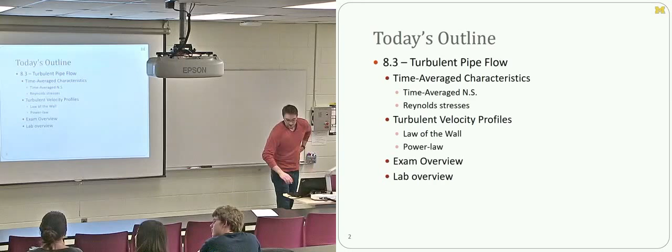All right, let's try to get through chapter 8.

So in the last lecture, as I said, we talked about laminar flow through pipes. In particular, we addressed turbulence, sort of talked about what turbulence is, but today we're going to get into the nitty-gritty a bit more.

Turbulent flow in general is a tough problem. There's no great way to describe turbulence exactly, and we don't really understand what makes it happen. All this random motion that happens with turbulent flow, we don't have the mathematical horsepower to track every single fluid particle and predict how it's going to move. We don't really have the refined theories, things like chaos theory and fractal geometry, that give us a cleaner way of talking about this sort of randomness. There are developing mathematical theories better suited to describing randomness, but we're still not quite there yet.

In general, remember that we judge the character of a flow through a pipe based on the Reynolds number, defined as the speed times the diameter of the pipe over the kinematic viscosity. Below Reynolds numbers of about 2,000, we call a flow laminar.

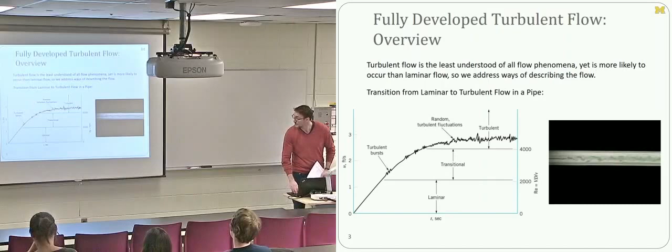We don't have a precise way of defining turbulent flows, but there are a number of characteristics which we see in almost all turbulent flows. It's one of those things where we can't really define it, so let's describe it. These characteristics are listed here. This guy from Texas A&M put together this list. I thought it was very eloquent.

First, we see that turbulent flows are almost always irregular. They're random, they're chaotic, they're fluctuating, and for that reason we have to use statistical methods to describe or characterize them. Turbulent flows are diffusive. That is, there's all this crazy motion of fluid packets, and it causes an enhanced mixing of fluid layers.

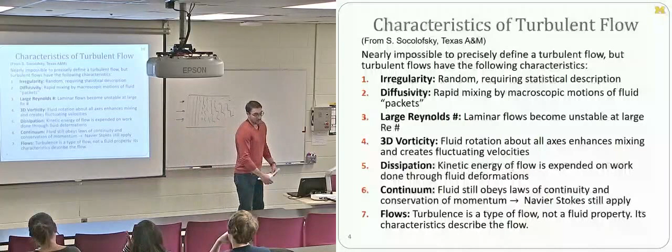These last two points are sort of sanity checks on us more than the flows themselves. We have to remember that turbulent flows are still a continuum, meaning nothing has changed about the physical system we're looking at. All of the conservation laws still apply, and the governing equations are still intact, meaning Navier-Stokes are still accurate. It's just a lot harder to apply Navier-Stokes because now all of our velocity components, we can't look at big chunks of fluid because there's so much small-scale random motion.

Finally, we have to remember that turbulence is a type of flow which remains distinct from the fluid that is flowing that way. In other words, we've got to keep clear in our head that nothing about the fluid properties changes when the flow becomes turbulent. There's different characteristics of laminar and turbulent flow, but in both cases, for our purposes, we have water as the underlying fluid. So keep the two separated as well as you can - the type of flow versus the fluid that's experiencing it.

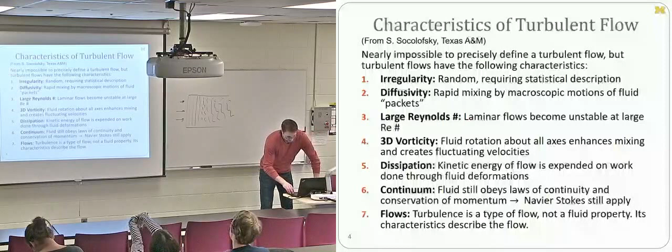So I found this video. It's actually from the conference I was at last week. There's this thing called the Gallery of Fluid Motion, which is sort of artistic presentations of fluid motions. This is a particularly nice video of turbulent boundary layers on the plate. I'm going to turn off the light so we can see it.

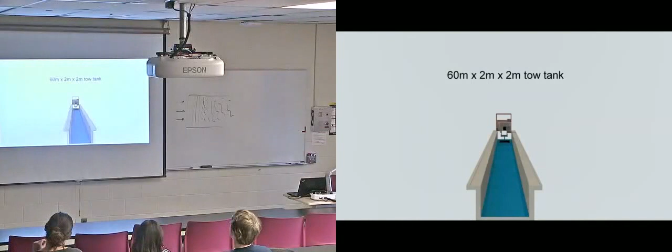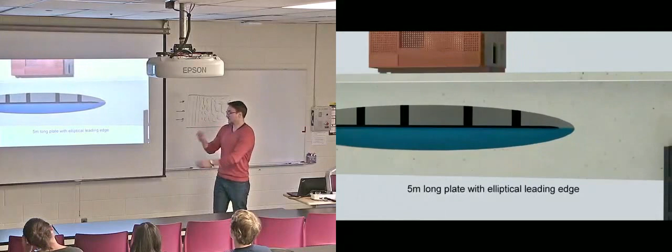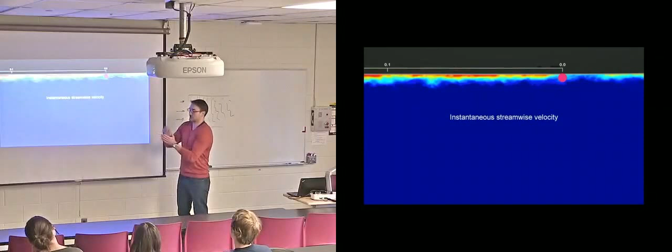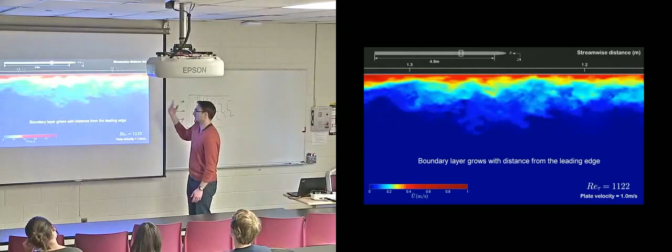They have this towing tank and this transparent window. I talked before about this thing called particle image velocimetry, involving rapid little flashes of laser illumination with cameras taking short time-exposed photographs, that the computer then uses this statistical description to draw velocity vectors and determine what the flow looks like. So what we're looking at here are contours of, I believe, velocity. We have the free stream velocity, and then this high velocity near the plate, which is getting dragged past the camera, indicating that we have the no-slip condition - the velocity of the fluid at the interface with the plate is the same as the velocity of the plate itself.

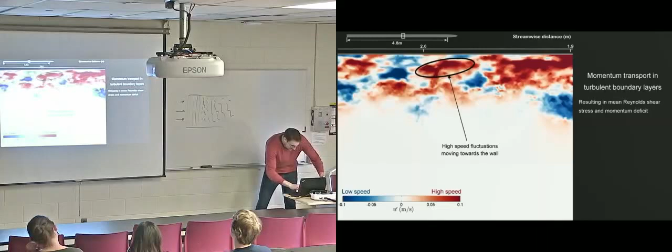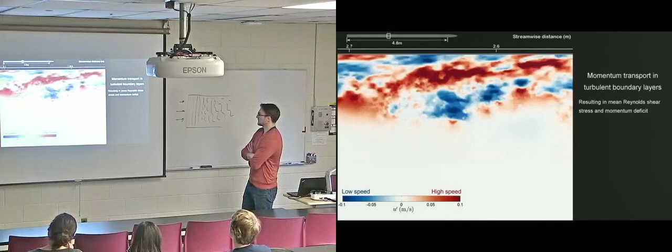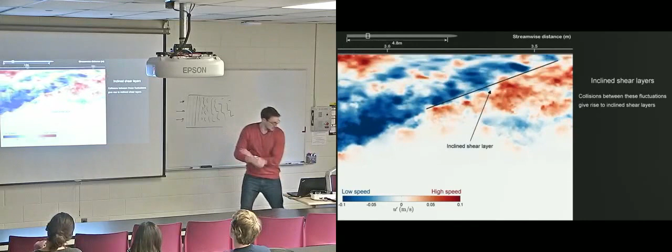We'll skip this little one here.

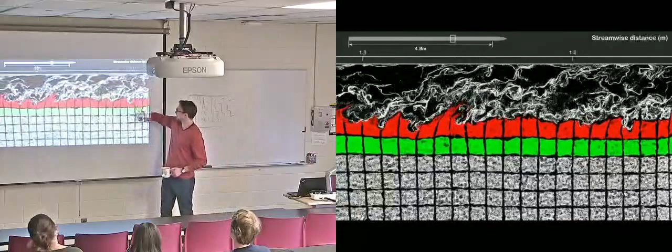We can see here another example - this is actually sort of a hybrid composite computer image, where again the plate is moving past, and they've used an algorithmic computer program to determine how a hypothetical distribution of particles gets dragged into and out of the boundary flow past the plate. So we can see all of this enhanced mixing, these large-scale turbulent or vortical structures, and this general swirliness of the flow. Hopefully you can gain an appreciation for the fact that, if nothing else, it's really messy - we don't have a nice, clean way of describing it.

Which brings us to one of the only ways we do actually have of describing turbulent flows, which is the so-called Reynolds decomposition.

Reynolds decomposition is fairly intuitive. If we have this fluctuating process - this fluctuating velocity, for example, on a pipe flow - let's draw a pipe, with flow through it with some velocity u. The idea is if the flow is turbulent, then we're going to have this underlying velocity u, but around that velocity, we're going to have all of these turbulent fluctuations. So Reynolds decomposition just says, let's treat the instantaneous velocity as a sum of an average velocity, u bar, plus a fluctuating term around that average.

It's not really shown here very well, but I want to make it a little more clear.

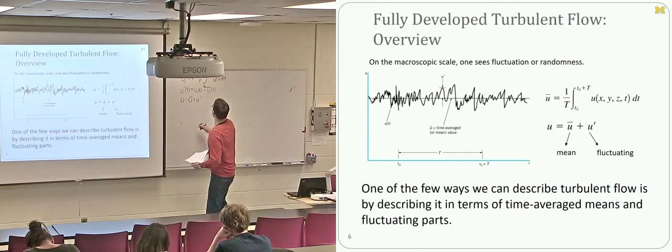It should be pretty clear that if we use the over bar here to define an average, that is, if we say that x bar is equal to 1 over T, integrated from T naught to T naught plus T, of x dt, then the over bar just indicates a time average over some period T.

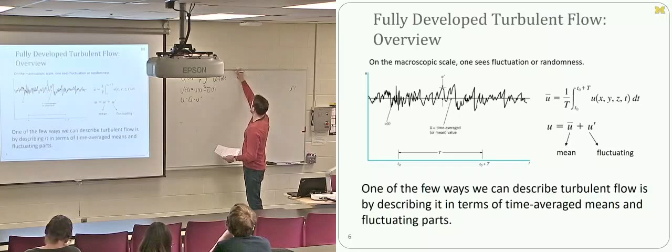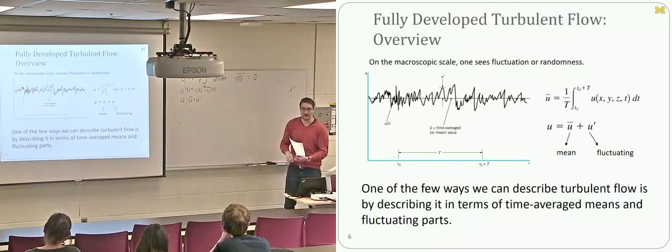U bar bar is equal to just U bar, right? It's equal to itself. The average of a number is itself. So the average of the average is its own average.

U prime bar is equal to 1 over T, integrated from T naught to T naught plus T, of U minus U bar dt, which is just equal to U bar minus U bar, which is equal to 0. In other words, the fluctuating component is equally distributed about the average. This should be pretty obvious as well.

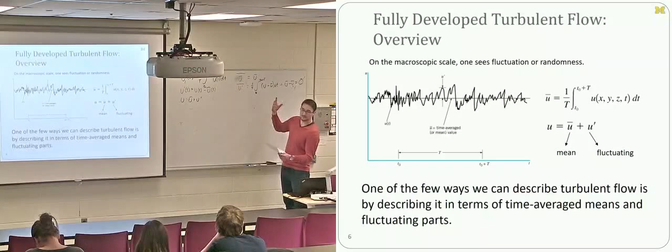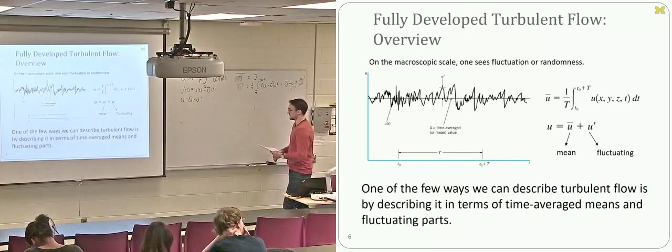Again, you might ask what's the point in all this? But the next thing we want to look at is not just taking the average of the fluctuating component, but taking the average of its square.

So if we take this fluctuating component and square it, if this gray portion is the fluctuating component only, U prime, squaring it gives us this dashed line, which is always positive. And since it's always positive, integrating over this and taking the average has to be greater than 0.

So if we define U prime squared bar, this is what we call the variance of the velocity. And it can be written as being equal to U squared bar minus U bar squared.

So this describes the total fluctuation that's occurring, the general fluctuating strength of the flow. If we take the square root of u prime squared bar, that's equal to the square root of u squared bar minus u bar squared, which we call the standard deviation of u. This could be interpreted as the average deviation from our mean background flow, u bar. None of it's hard, it's just a matter of keeping your bars and primes straight.

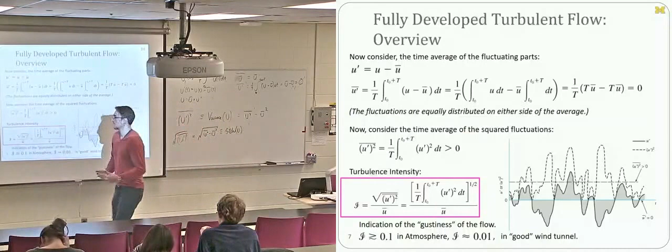If we have two different flows that both have the same average flow velocity, let's say they're both 5 meters per second. But then we have this fluctuating component, which in this case is really large.

We may find that the standard deviation of u is equal to maybe 1 meter per second. In this other case, let's say we have much smaller fluctuations - here we may find that the standard deviation of u is equal to only 0.1 meters per second.

So the turbulence intensity of these two cases: in this one we'd have I equal to 1 meter per second over 5 meters per second, which is 0.2. In this case, I equal to 0.1 over 5, which is 0.02. In other words, this flow has a 20% turbulence intensity, this one has a 2% turbulence intensity. It doesn't matter what the background flow velocity is itself - we're able to see how proportionally unstable and fluctuating it is. We'd just look at these two numbers and say this is a much cleaner, less turbulent flow than this one.

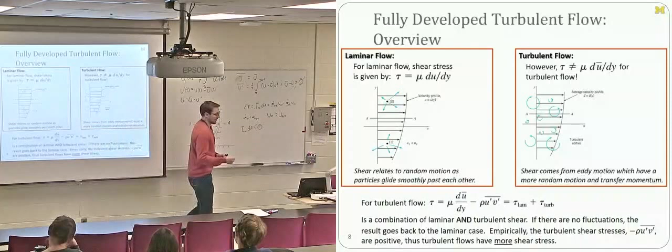And write it as the laminar shear stress plus the turbulent shear stress. So we have these two components. One is caused by this good old Newtonian viscosity of the background flow, and the other is caused by this diffusion of momentum throughout the flow created by this enhanced mixing.

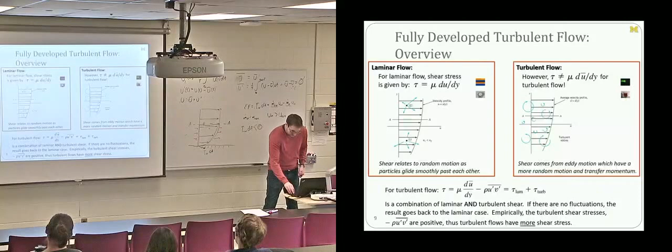So as a demonstration, consider if we have this boundary here in a laminar flow. That's not a very good video, but that's what we've got to work with. We can see this if we have something like a low temperature and a high temperature in laminar flow.

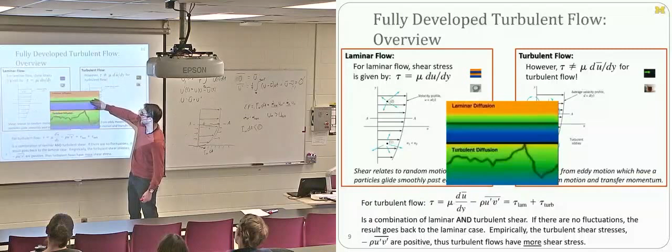The only diffusion of this temperature occurs on a molecular scale, creating very slow mixing, whereas in turbulent motion, because of these random velocity fluctuations, it causes things to spread out much more quickly. And the same is true of velocities and momentum.

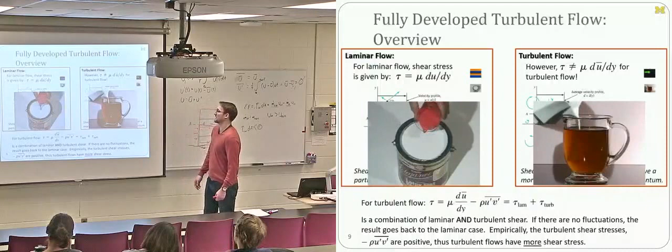This is a good demo of just how much mixing is enhanced in turbulent flow versus laminar flow. What we've got over here is a very thick viscous fluid, low Reynolds number, laminar flow. And over here we've got tea and milk, both low viscosity, therefore high Reynolds numbers.

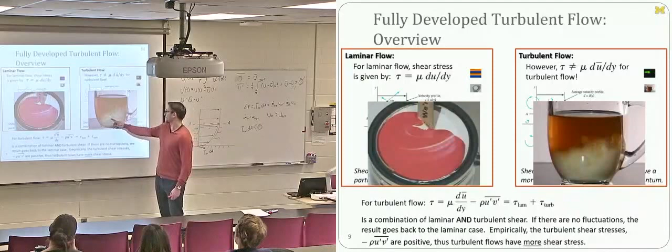What we can see is that just by inspection, we see all this random clouding and mixing, which indicates this random fluctuation. Whereas over here, as we mix, we get these striations and continuation of lines in the thick viscous fluid, which indicate that our diffusion here is not occurring very quickly.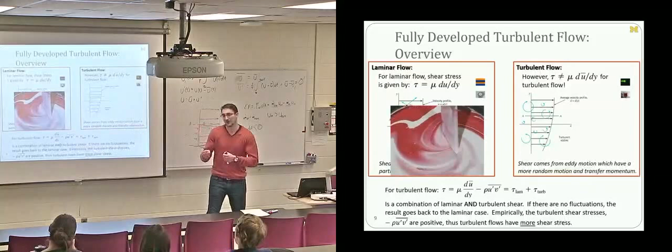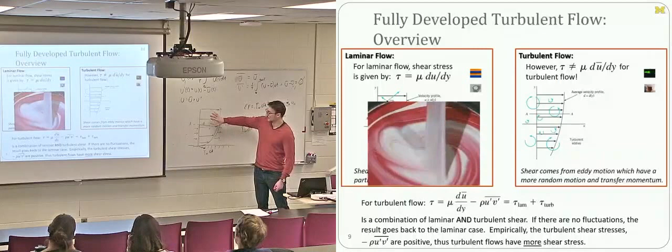So this is just to demonstrate that the reason shear stresses are higher in turbulent flow is because those fluctuating components transport momentum from the higher velocity regions into the lower velocity regions more quickly.

All right, so we've got this relationship for shear stress as a sum of laminar and turbulent shear stress components, and the idea is to see how we can actually get to this, if we can figure out what this turbulent shear stress comes from.

So let's suppose we're not really interested in the random fluctuations themselves. If we're considering something like flow through a pipe, or flow over an airplane wing, or flow around a submarine, that all may be turbulent flows, we're usually more interested in the time averaged character of the flow. We want to say how much flow is going through the pipe, or how much lift is being generated on the wing, or what's the drag on the submarine, and you ignore all those tiny little fluctuations.

Which indicates that we're really interested in this U-bar component, right?

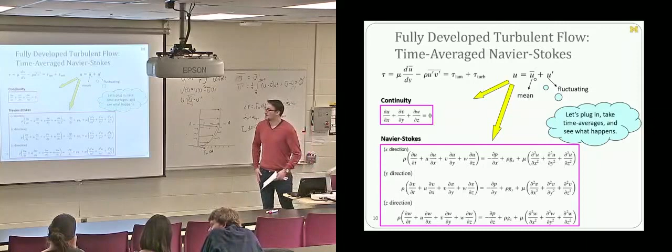So these are nasty. We're going to make them nastier by adding some more terms. But I just want to kind of frame what we're doing now.

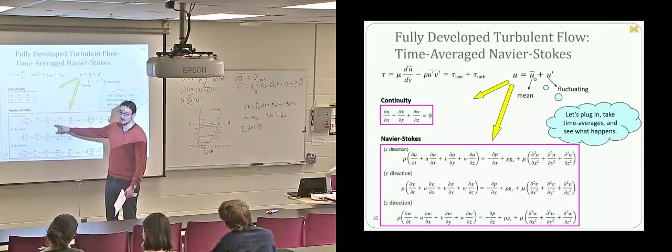Conservation of mass, conservation of linear momentum. We don't care about everything that's in the U prime term now, and we're hoping to average out all those little fluctuations and just get equations that govern the gross time averaged or slowly varying character of the flow. So if we wanted to solve for the steady flow over an airplane wing and say how much lift is being generated, on average, forget all those tiny little wiggles around the average. If we just want that average value, what equations do we solve to get that?

So the first one, and we're going to go through this kind of quickly to save time, but all of these slides are up on Canvas, and I think they should guide you through the process pretty well.

So if we take continuity, the continuity equation, conservation of mass, we usually write it as du/dx plus dv/dy plus dw/dz is equal to 0.

If we take the time average of this entire expression, what we get, we can split this into the time average of each individual component. Then we can make this substitution here, the Reynolds decomposition, in for u, v, and w.

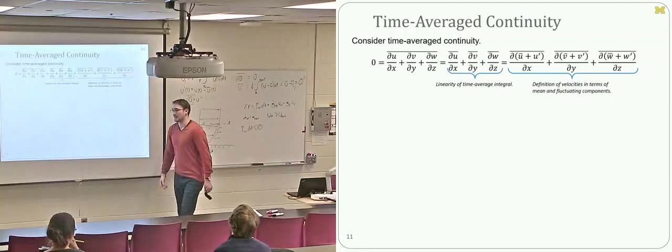So in doing this, we're exercising two properties. One is that time averaging is a linear operation, meaning if you take the average of A plus B, it's the same as the average of A plus the average of B. And then we've plugged in our Reynolds decomposition here.

So we can now rearrange these terms. If we look at just this term here, using the same linear property, we can split the U bar and U prime up, so we end up with partial U bar and partial U prime, each with an independent average over them. We know that this term here is equal to 0 because the average of the fluctuating component is 0. And so this leaves us with just du bar dx.

And so doing this for the v and the y, or w components as well, we get the time averaged continuity equation. This is what we were hoping for, right? It's the same equation we were working with before, but now it describes just the time averaged flow.

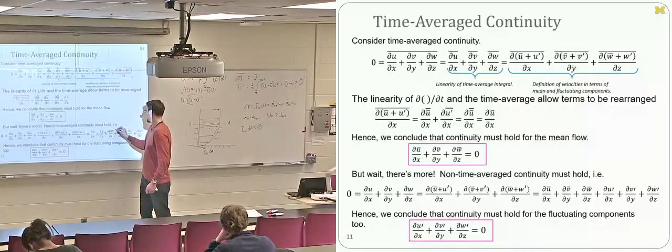But before we move on, we could say, alright, I know this, but what if I go back and undo this time average and just look at the regular continuity equation, making the same substitutions? I can now write it out as the sum of a time averaged continuity and a fluctuating continuity. Since this component here is equal to 0 by this definition, we can take this component and say it's equal to 0 as well.

And so we've learned two things from this time averaging. One is that if we're only interested in the average flow, conservation of mass, taking the average of the governing equation over time does give us something that governs only the time averaged flow. But if we are interested in the instantaneous flow, we now also have an additional equation. We picked up one more governing equation, which tells us that the fluctuating component at all times must also on its own satisfy conservation of mass.

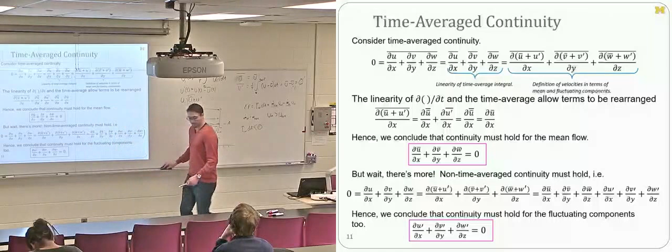Next, we move from - so that was the easy one, that's conservation of mass. Now we want to look at the Navier-Stokes equations.

So let me pull this back. Here's Navier-Stokes as we've been using it and writing it. Except this is supposed to be a dy here. Give me a moment. There we go. Alright, there's our regular Navier-Stokes.

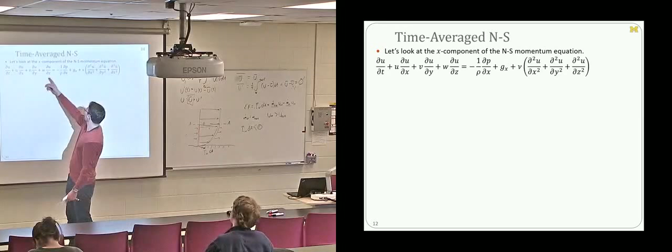So now if we take each of these terms, and if we take the average of this whole thing, then by linearity, we've seen that it basically means the sum of the time average of each individual term. So putting the bar over the top of each thing in this equation in turn, we can see what's going to go into the full time averaged equation.

So the average of du dt, we can write out by this expansion, just gives us d dt of the time average du. That's easy. Same with the pressure fluctuations - pressure, like velocity, in turbulent flow is going to have this random component. Taking the time average of p, or of its rate of change, gives us the rate of change of its average. Same with everything in these components.

The d squared u dx squared, we can see here, basically just turns into, again, because the average of this fluctuating component goes to 0, it falls out and we are left with only the time averaged component.

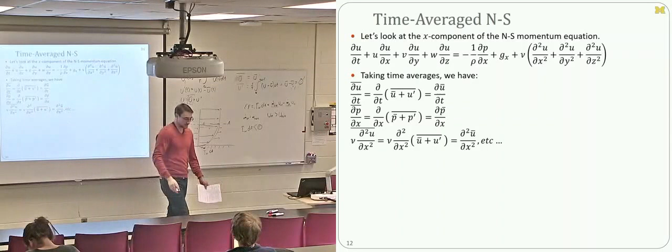So if you're like me, when you took a course like this, at this point you're kind of like, alright, this is pointless and boring, and why are we going through just averaging terms and showing that the same thing happens to each one? It's because these three terms have one thing in common: du dt, dp dx, and d squared u dx squared. All of these are linear terms, meaning there's no multiplication of u times du dx or du dz.

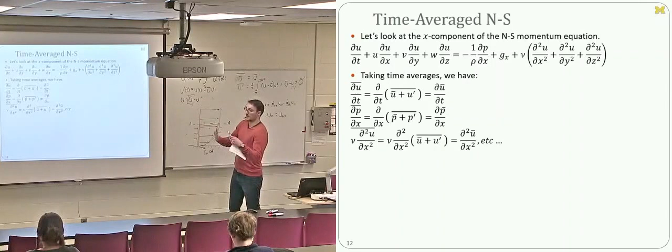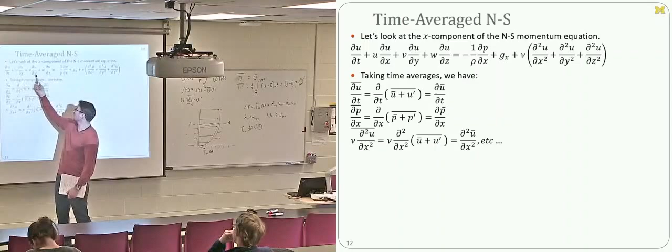Linear terms - we have averaging, which is a linear operator, and we have differentiation, which is also a linear operator. So everything here is linear, meaning that because it's linear, it doesn't really matter what order we do the operations in, and the averaging will always get rid of the fluctuating component. However, these three terms here in our convective acceleration are nonlinear, and this is where things are going to get a little bit hairy.

If we take, for example, just this u du/dx term, and we time average it, making the substitution of our Reynolds decomposition in for u in these two places, we get this expression where we have u bar plus u prime times another component involving u bar plus u prime. So now distributing this whole thing and expanding it out, we expect 4 different terms to result. We'll now have a term involving 2 u bars, a u bar and u prime, and 2 u primes.

That was supposed to show up before. There we go.

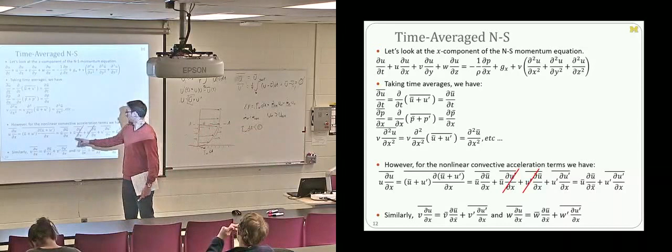So because we know that u bar, the average of u bar, is basically itself, it's a constant, and u prime here is the fluctuating component, then any term that involves u prime times u bar, once we take the average of it, is going to go to 0. The same way that taking the average of just u prime gives us 0. If we multiplied this by u bar, u prime, and took the average of that, we would just get u bar out front here, and we would just end up with 0 times u bar.

It doesn't change the fact that it comes to 0. So we can cancel out these two middle terms, leaving us with just this term and this term, which have been rewritten to account for the fact that the average is itself again. So we end up with u bar du bar/dx. That bar doesn't need to be above the x, but whatever. And then the average of u prime du prime/dx.

So similarly, doing the same thing for the v and w components in the convective acceleration, we can write them using the same sort of expansion, meaning that the time average of our whole convective acceleration term can be written as a sum of a time averaged part and a fluctuating part.

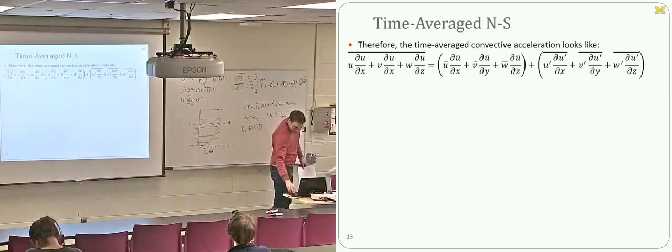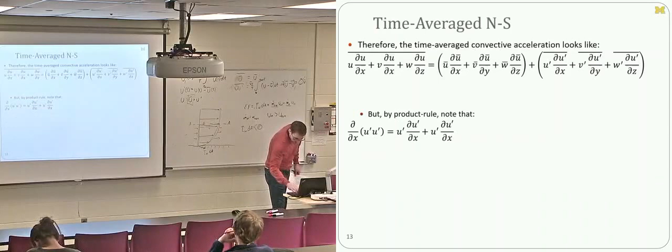So one more manipulation to be done to this. If we use the product rule, we can see that if we were to take the partial derivative of u prime u prime, we would expand it out into two terms by the product rule. This is what I wanted: which means that if we just subtract one of these sides over, we can write u prime du prime/dx as the difference between its two components.

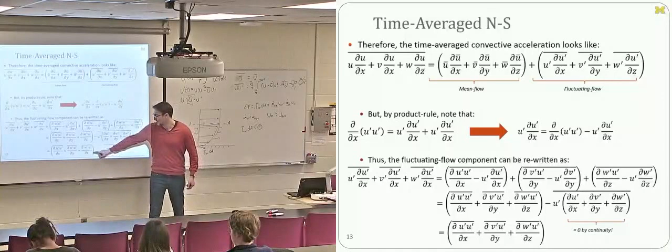So finally, if we plug everything back into the Navier-Stokes equations, we get something that looks like this. One more small manipulation: if we take the right-hand side and we factor out a rho and just kind of shift things around, there's nothing too complicated here. At this point, it's just algebra.

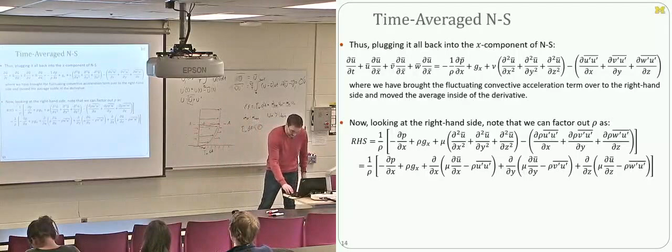We can write the right-hand side here as being equal to the pressure force, gravitational force, and then these. Remember before, the equations of motion basically came down to negative dp/dx plus g_x plus d/dx tau_xx plus d/dy tau_yx plus d/dz tau_zx. This is how we wrote the surface forces, or the forces on a fluid element, the partial derivatives of the shear stress components. So we can see this takes the same form, meaning that the components inside of these parentheses are actually shear stress.

And so we recognize these terms that have the Newtonian viscosity coefficient as being what we will call the laminar viscosity terms, or laminar shear stress, and these other ones here as being the turbulent shear stress components.

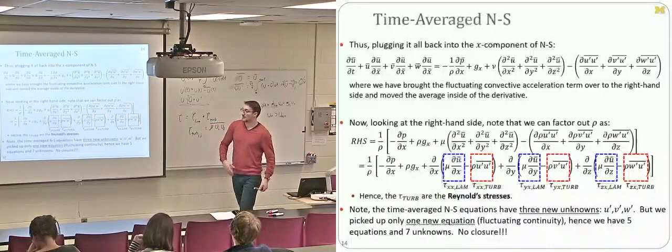We plugged that into Navier-Stokes and took the time average of it and arrived at this, which is called the Reynolds averaged Navier-Stokes equation. This is in the x direction only; we would have similar ones in the y and z directions. The only difference between the Navier-Stokes equations and the Reynolds averaged Navier-Stokes equations is that we have these bar terms, right, we're now talking about average flow components, but also we've picked up these fluctuating terms here. So we have an additional Reynolds stress involved in the forces on a fluid element.

So at this point it's wise to step back and say, all right, we've got this new set of equations which describe turbulent flows, or the average character, the slowly varying mean of a turbulent flow. How many equations, how many unknowns, how well defined is the system of equations that I have?

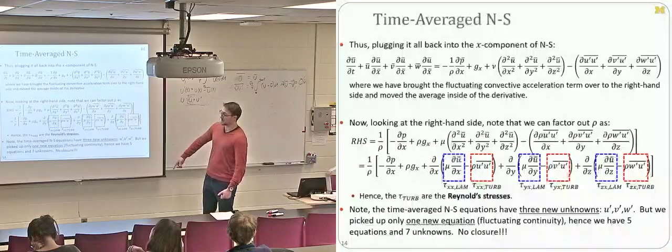So by these RANS equations now, we've added three new components, this u prime, this v prime, and this w prime. These are all unknown. At the same time, a few slides ago, we developed one new equation, which was the unsteady fluctuating continuity equation, right, the one that says du prime dx plus dv prime dy plus dw prime dz is equal to 0. So we picked up one equation.

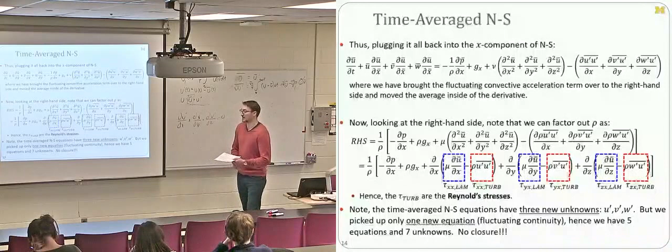As a result, we now have 7 unknowns and 5 equations. This is not a solvable system. So this opens up the big can of worms that most CFD scientists and computational people bang their heads against for years, which is how to develop what's known as a closure model. They propose equations, theories, that give us 2 more equations allowing us to make a solvable system out of the Navier-Stokes and continuity equations.

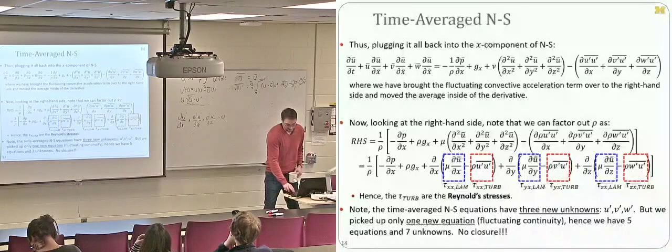This is something you're undoubtedly going to hear more about in later years, but I just wanted to glaze your eyes over one time.

Okay, so we've got this balance of laminar and turbulent shear stresses. I want to write this out real big so we can reference it: tau is equal to tau laminar plus tau turbulent.

By the way, those equations that we went through in the previous slides aren't specific to pipe flow. Those are just the general RANS equations, useful for describing turbulent motions and the equations of turbulent motion on all sorts of bodies, not just in pipes. So I want to be clear about that.

The next thing is that, remember from the last lecture, we talked about the idea of fully developed flow in a pipe. We had this fully developed flow going through a pipe, and we took a kind of a slug of fluid here, and did a free body diagram on this element of fluid to find the balance between pressure forces and shear stresses on the element, right?

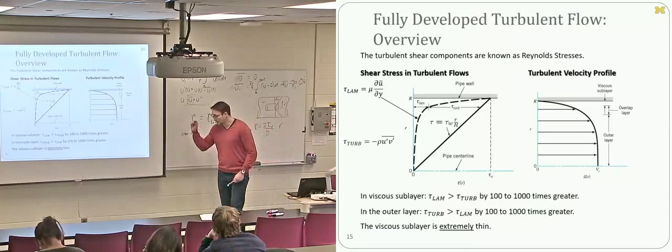This viscous sublayer in general is very, very thin. I think the number I read was that for something like a 3-inch diameter pipe, fairly small, the viscous sublayer is about 1/1000th of an inch thick. So we're talking about a really, really thin layer of liquid stuck to the wall.

The velocity profile that gives us this sort of shear stress, remember, the laminar shear stress component is some function of the velocity gradient. This has to remain linear, but as I said, when it becomes turbulent, a greater portion of that shear stress is made up of this turbulent component.

So out here in the outer layer, that means that more of the shear stress comes from these random fluctuations and less comes from the slope of the velocity gradient.

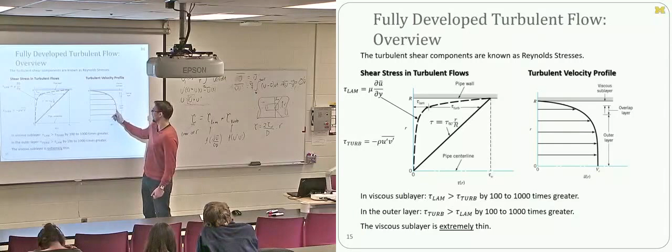And so if we look at the typical velocity profile of a turbulent boundary layer, really near the wall in the viscous sublayer, where most of the shear stress is laminar, it's coming mostly from a large velocity gradient, meaning that near the wall we have this really high slope in the velocity. Further away from the wall, as we get more and more fluctuation, less of the shear stress comes from this velocity gradient, and so our velocity gradient flattens out here. Our velocity profile becomes much less dependent upon the distance away from the wall.

We're going to skip those.

And finally, this is the last of the slides. There are ways that we've developed over the years, mostly using dimensional analysis and very careful experiments, to describe what this velocity profile looks like. So generally what they do is say, all right, near the wall we have mostly laminar flow. Let's do a dimensional analysis of the viscous sublayer and come up with something that describes the velocity profile there.

And so in the viscous sublayer, dimensional analysis has shown that the velocity profile on average follows this relationship, where this u star component is what we call the shear velocity, or the friction velocity. This is really just a substitution made - it's not actually velocity, we just call it the friction velocity because this quantity has the same dimensions as velocity, length over time.

So this is a dimensionless expression for the average velocity over this shear velocity term, which is equal to the distance from the wall times the shear velocity over viscosity.

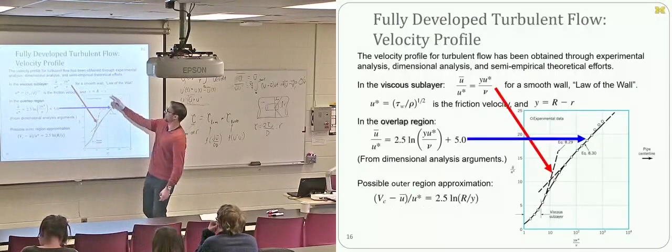This is the last slide. So we have that weird expression involving shear velocity or friction velocity that comes from dimensional analysis in the viscous sublayer. In the outer layer, the most common—this is what we call the law of the wall, or the wall relationship. This describes the velocity for almost any flow really close to a solid boundary in the viscous sublayer.

And further away, we have what we call the power law, meaning that the average velocity divided by, for a pipe in this case, the centerline velocity. If this is our velocity profile, the average velocity at some point relative to the centerline velocity is going to be some component or some power of the distance from the wall.

The real takeaway from this talk on velocity profiles is that if we have a pipe with a fully developed velocity profile, a laminar velocity profile is going to be parabolic. We solved that last time exactly using the free body diagram of this wedge. And if it's turbulent, we're going to get something that looks much weirder—it's going to have a sharp slope near the wall and be much flatter near the centerline. The stress in the turbulent case is going to be much higher.

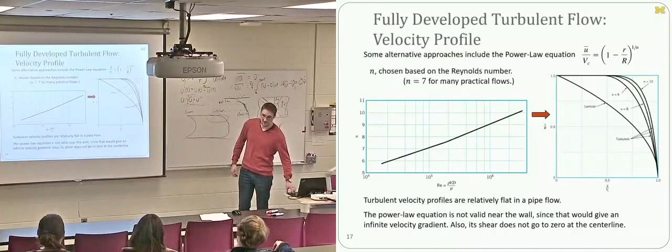Okay, so that wraps up our discussion of pipe flow. I know this one was kind of a whirlwind of equations, but we'll be covering some more of the turbulence and velocity profiles and boundary layers on Friday and next week. Those are going to be the topics of our last chapter on external flows.